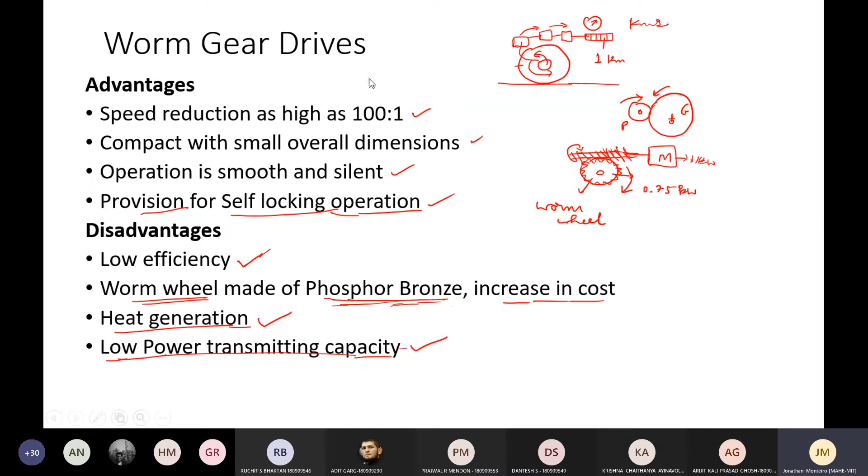In the previous class, we were discussing the advantages of a worm gear and how a worm gear actually functions. So as seen previously, let me give you that animation again.

You have a screw, a helical screw, which rotates on its axis. It's made of a harder material when compared to the material of the gear itself. We have seen the reason for that also.

So the harder material screw rotates and traverses through the edges of the tooth of the gear itself. The gear resembles a spur gear, it's almost a spur gear. Some of the differences being the teeth are slightly inclined and also the teeth profile is not straight, as you can see it has a kind of curvature.

The reason being it has to accommodate the rotating screw on its side. So this is the only combination that can take care of it.

And the reason we have a harder and a softer material combination is that every helical groove will have its own loading, its own size, and you cannot fit any worm to any worm wheel.

Any worm cannot be fitted to just any worm wheel. And once you fit it, the harder material will impinge on the softer material. Some edges may get worn out and some edges will be retained in the teeth itself. But whatever it is, it will adjust in the combination in such a way that it will be helpful for a longer life.

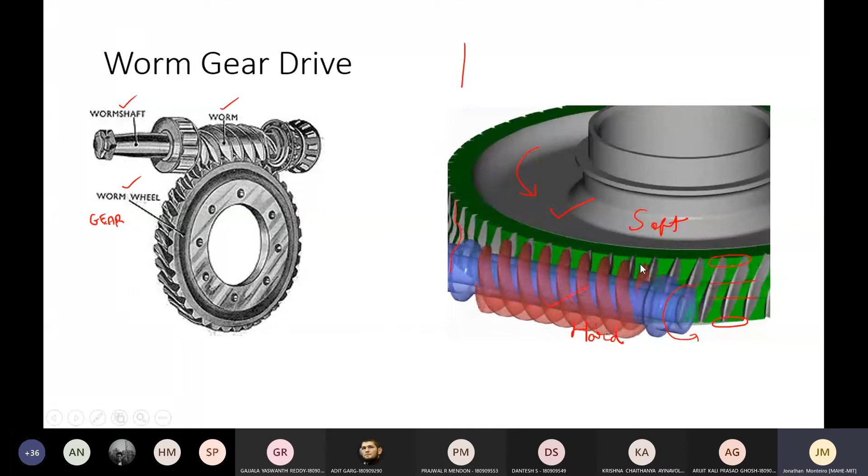Now in spur gears and helical gears, we had a concept where the face width ratio was being maintained, and we had Z1 and Z2, the number of teeth on the pinion and number of teeth on the gear, exclusively mentioned. We know that Z2 in the softer gear wheel is something we can define, we can count the number of teeth because it almost resembles a spur gear.

But what can you count on a worm? A worm just has a screw, it does not have teeth in itself, it will not function as teeth. Of course, when it rotates, it traverses and pushes the gear wheel itself, but we cannot describe it as one tooth and the next adjacent tooth.

So how can we describe the Z1 and Z2 combination here? We'll go to that theory part now.

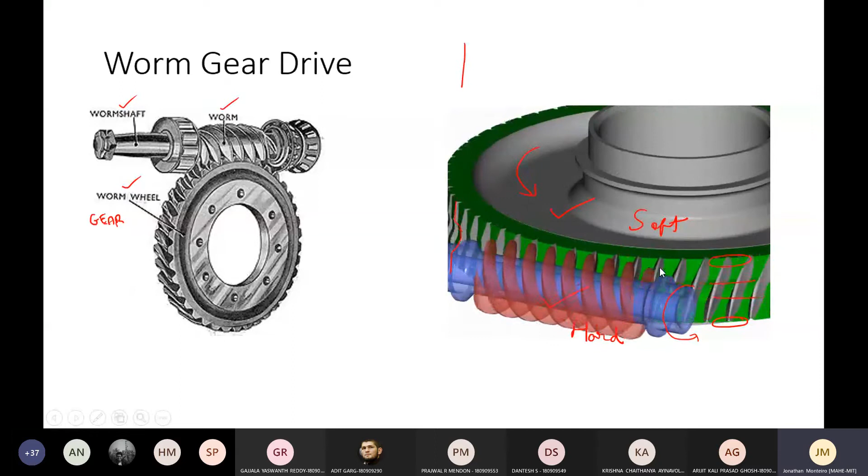This is a designation used for describing a worm wheel: Z1 slash Z2 slash Q slash M. So these four numbers, separated by a slash in between, form the designation given for a pair of worm and worm wheel. What each of them means, we'll find out individually.

Let us know something we are already familiar with. M is the module, that is diameter divided by number of teeth, that is what is described by M. Z2 is the number of teeth on the worm wheel, so that is straight away defined. We have the number of teeth on the worm wheel and we have M, the module, which is described for a particular combination. Now what about Z1?

We know that you cannot just describe teeth by counting 1, 2, 3, 4, because we are dealing with a helical groove or a worm. So what is Z1 here? Z1 means the number of starts, also called threads, on the worm.

This number of starts on the worm, as you can describe here, you have studied this in your lower classes also, and maybe in one of your labs you were introduced to this, that is, what do you mean by number of starts. So here, let me describe it with some figures I have put up.

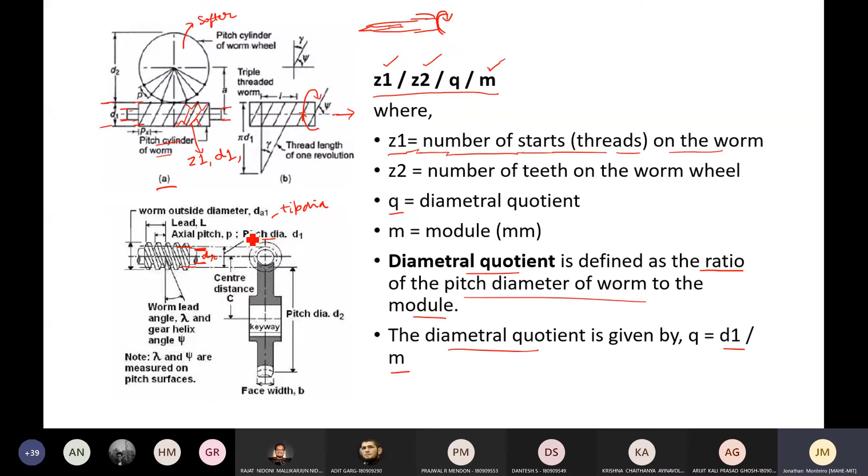And the diametral quotient, d1 by m. This is just what I described - lead, how we describe the single start and double start.

Let me start from the beginning. Axial pitch - distance measured from a point on one thread to the corresponding point on the adjacent thread, measured along the axis of the worm. So axial pitch, or simply pitch, it is from one point, for example from here to here. This is pitch, or from here to here. Everything remains the same - that is the axial pitch.

Lead - distance that a point on the helical profile will move when the worm is rotated through one revolution. So you give one revolution, how much it will move, that is what I was describing earlier. If it is a thread advance in one turn, single start thread, lead is equal to the pitch - L equals P for Z1 equal to 1. For Z1 equal to 2, double starts, lead is twice the axial pitch - L equals 2 times pitch. So you rotate only once, but the axial traverse of the screw would be 2 times the pitch length.

Other two angles are described here - also important when it comes to load holding capacity and traverse. Lead angle: angle between a tangent to the thread at the pitch diameter and a plane normal to the worm axis. I think you can see that here - worm lead angle lambda and gear helix angle psi, measured on the pitch surfaces. And helix angle: angle between a tangent to the thread at the pitch diameter and the axis of the worm.

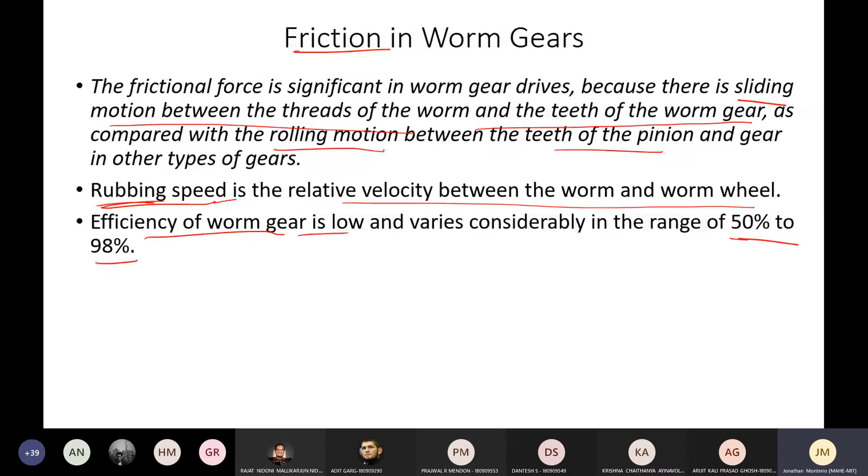So other things I just mentioned, we have also seen some self-locking drives. A gear combination is said to be self-locking when the coefficient of friction is greater than the tangent of the lead angle. So again, the lead angle has prominence here. Coefficient of friction greater than the tangent of gamma, the lead angle, we call it self-locking. What is the concept of self-locking? I have explained in the previous lecture that usually the worm only rotates the worm wheel. The worm wheel in turn cannot rotate the worm. So such drives are called self-locking drives.

If a worm wheel is able to rotate the worm back, the reverse drive is possible. This is called non-self-locking, also called reversible drives.

Why is it required? Of course we would go with a self-locking drive because we want to prevent something from happening. But sometimes if the load is too high and unpredictable, it is safer to have a reversible drive so that it will prevent damage to the drive. If the load is very high, there is catastrophic damage, or the teeth will simply get fatigued, cut out and come out of the system. So we don't want excessive failure to happen. Both are extensively used, but wherever there are critical applications where we never want the drive to fail, or preventing damage to the drive is really an issue, we go for a reversible drive. For smaller applications where we have control over the loading mechanism, we can go for a self-locking drive.

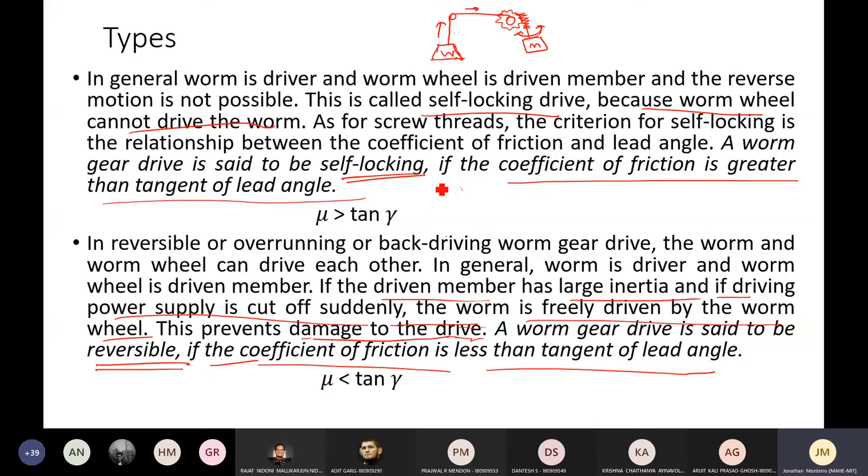One of the parts we would like to understand here is that a screw traverses over the gear. So one thing is for sure, a lot of heat is getting generated because the worm gears continuously rub against each other.

Yeah, I think, sorry, okay, just had to respond to a message.

So when the worm gears continuously operate, a considerable amount of heat is generated. You have constant rubbing of one surface over different sets of teeth. Though the teeth get some time to come back and re-engage, the worm itself is subjected to a lot of heat because the same surface is getting rubbed again and again. So considerable heat is generated. The amount of heat generated is given by this equation: Q equals mu Fn Vr by cos gamma, where gamma is the lead angle, mu is the coefficient of friction, Fn is the normal force vector, and Vr refers to the rubbing velocity, or the relative velocity between the two surfaces that are rubbing. That is why it is called Vr, or rubbing velocity.

Now the heat is dissipated through the lubricating oil to the housing wall and finally to the surrounding air. So whatever Q is generated, you want to liberate it to the surroundings. If it is ambient air, you need to keep some artificial cooling method. Otherwise you would rather have it dipped in oil, a lubricating oil. But oil also has its own characteristics. You would like to select an oil and also ensure the oil is continuously lubricating and the heat is continuously getting removed.

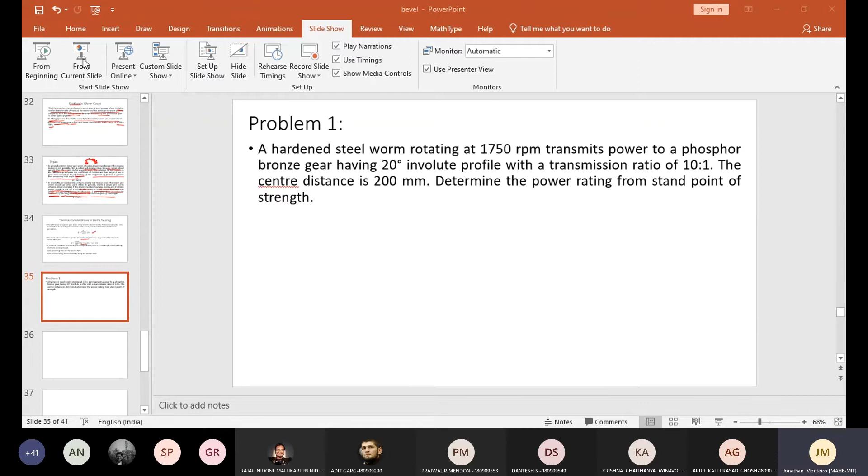So I think you've taken down the problem. We'll discuss it slowly, step by step.

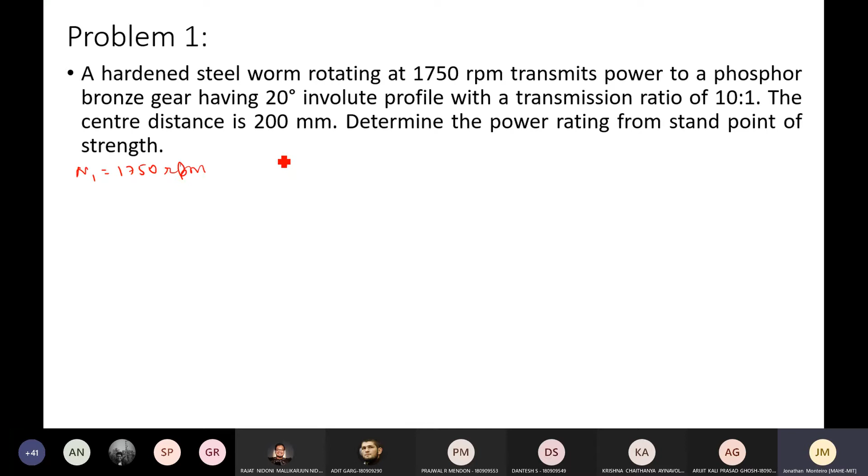A hardened steel worm rotating at 1750 RPM. Let me write down the data: N1 is 1750 RPM. It transmits power to a phosphor bronze gear having a 20-degree involute profile, so alpha is 20 degrees.

With a transmission ratio of 10:1, so I is equal to 10:1. Center distance is 200 mm, which is one very important factor for us to consider. Till now, center distance was not a huge issue when we did spur gear, helical and bevel gear, but here it becomes very prominent. So nomenclature according to your data handbook is A, and A is 200 mm.

So determine the power rating from the standpoint of strength. We'll determine what is the power rating - how much power can be transmitted with such a gear. One of the foremost things we know is that speed is given, speed ratio is given.

We are very quick to write one relationship: I is equal to N1 by N2, the speed ratio, which is also equal to Z2 by Z1. But the question is, is it equal to D1 by D2? Or I would say D2 by D1? If you look at the combination here, is it D2 by D1? Is this true?

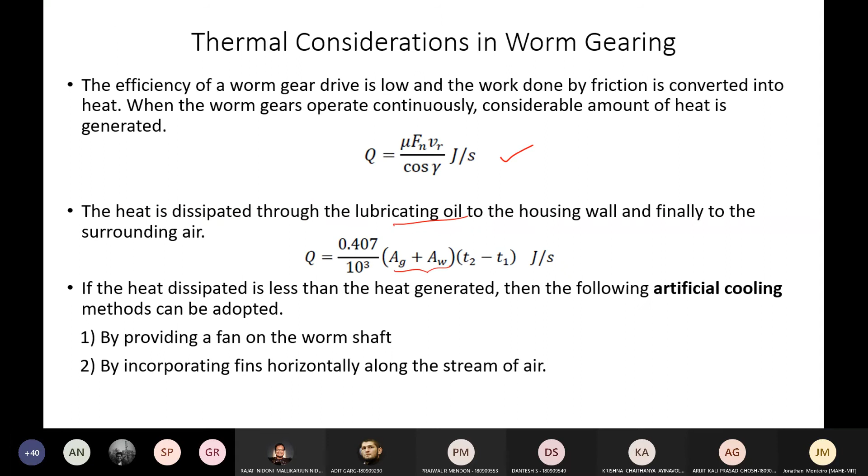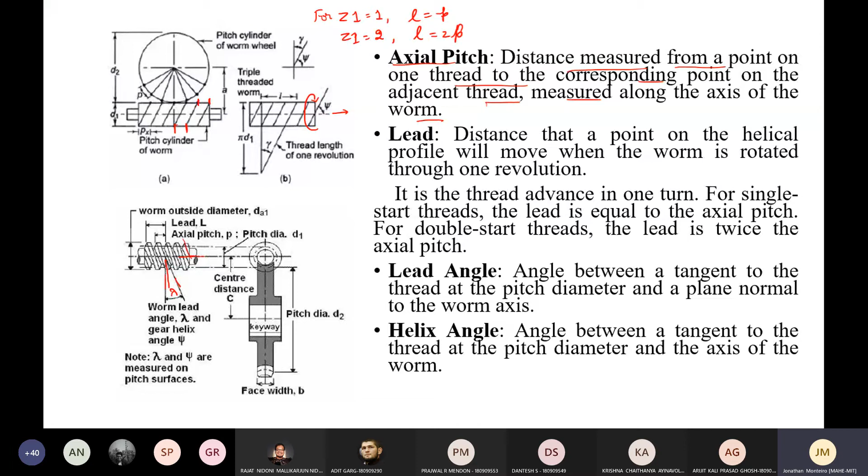Can you guess D2 by D1? Is it true? You have a very small worm rotating a very large worm wheel. Is it equal to this combination, this ratio D2 by D1?

So this is true, that N1 by N2, the speed ratio or transmission ratio, is also equal to, as we described, Z1 refers to the number of starts, and that is taken care of in this Z2 by Z1 relationship.

No, actually it won't be equal. This is not equal to D2 by D1. How, sir? Because you can have a very small worm. See, in all other cases, you had engaging teeth - one-to-one engagement was there with all the teeth, whether spur or helical. That one-to-one engagement with its module gave rise to this equation, that the transmission ratio was there.

But now the type of engagement itself is different. The rotating screw may be very small, and this you can make very large. As far as your question is concerned, these are two different axes on which it is rotating, completely different axes, and there is no proper one-to-one engagement between the teeth. It's just a screw rotating on its axis, and because of the rubbing velocity and rubbing action between those grooves, each end of the tooth gets pushed subsequently by the next groove that is coming in and adjoining.

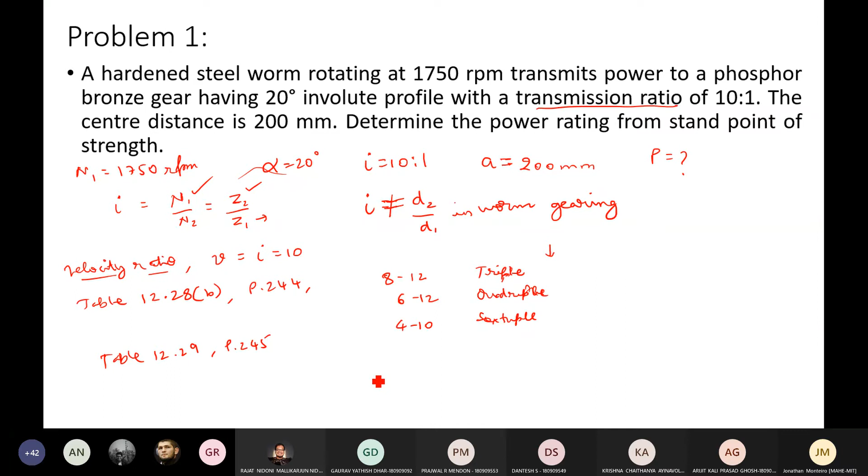With the number of starts, I think we have to refer something here. Hold on, students. Actually, yeah.

Based on this page 245, you see there are 8 columns over there. In table 12.29, you have 8 columns. First column is called module, second column is called axial pitch, third is called number of starts, fourth is diametrical quotient, that is Q1 by M, D1 by M it is, and reference diameter is D1.

Okay, the actual diameter is D1. And there is tip and root diameter, which is not that necessary here. Even lead angle is also not that necessary for our calculation as of now. So,

Which one to take here? Now there are so many combinations here. Module, it starts with module 1, then go from 1.25, then 1.5, 2, 2.5, 3, 4, 5, 6, 8, and so on. It goes on till next page module called 20. So many... hello, some disturbance here. So please mute your mics if you're not asking any question. Okay.

You can choose any one of them, but remember your center distance is around 200 mm. Your center distance is around 200 mm. Okay, so it is quite large. It is not something very small where you have 10, 20, 30 as your diameter, but it actually is quite large when compared.

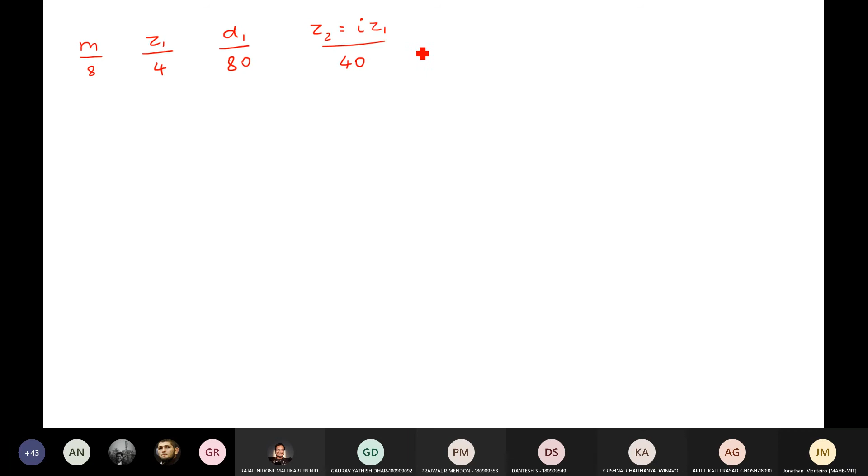What about Z2? We know it is I times Z1. This we have proved. So here, Z2 is 40. I'm just describing it as a table. What are the things that we need now? Let me put it in table form. What about D2? D2 is M into Z2. Why? Because the worm wheel is a spur gear. So D2 equals M into Z2. Here how much? 8 into 40 is 320.

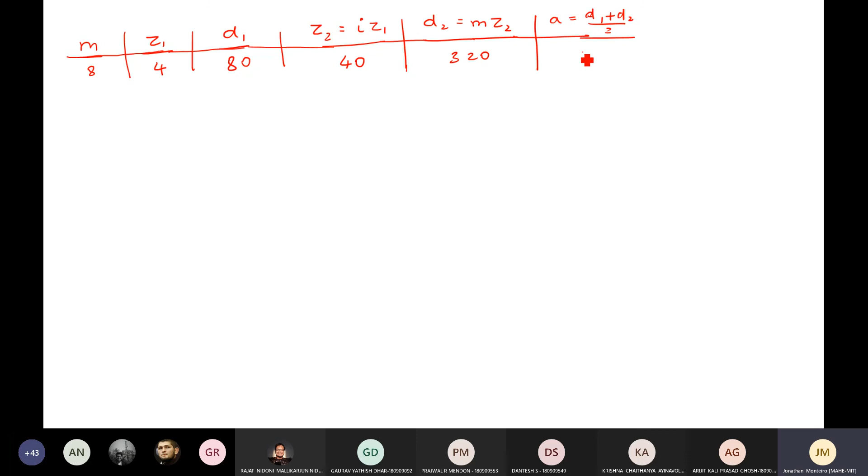And finally A, the center distance: D1 plus D2 by 2, this is true in the case of any gear. The center distance is half the sum of the diameters. So when you do this, how much is this? Guess. 200. Yes, exactly what we required. Center distance is 200. So this is one combination that will satisfy all the requirements of the given problem. We have come back to the same original center distance of 200. We have taken care of the number of starts. Based on number of starts only, your Z2 came to 40, and that Z2 gave rise to 320, which finally brought us to the center distance of 200.

A student says: Excuse me sir, I didn't understand why we took number of starts as 4. Why can't we take it lesser than that?

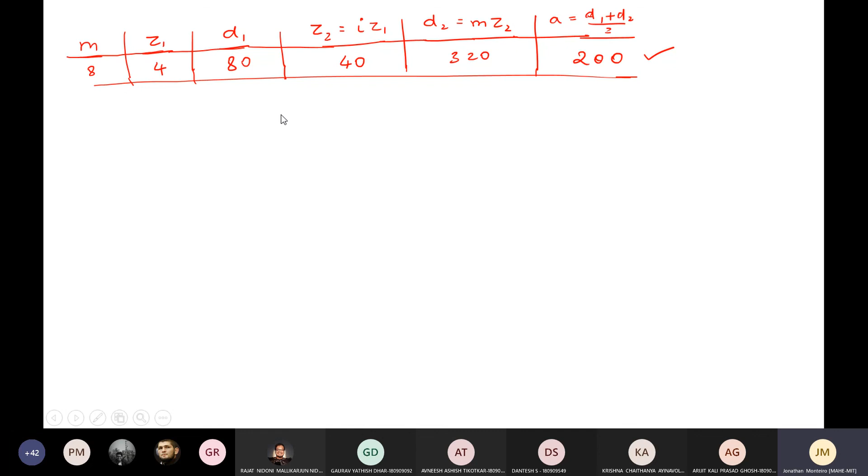If you take... you have to refer to the previous table, 12.28b. Let me go back. Double start range is above here, 12 to 16. But our value is 10. It does not fit here. Double start does not fit.

12 to 16 is this velocity ratio, right? 12, 13, 14, 15, 16, you can fit it here. 10 will fit only in these three. Got it? Out of these three, we eliminated the lowest one because there was no combination available. We went for 4 and found it satisfactory. 6 is not needed here.